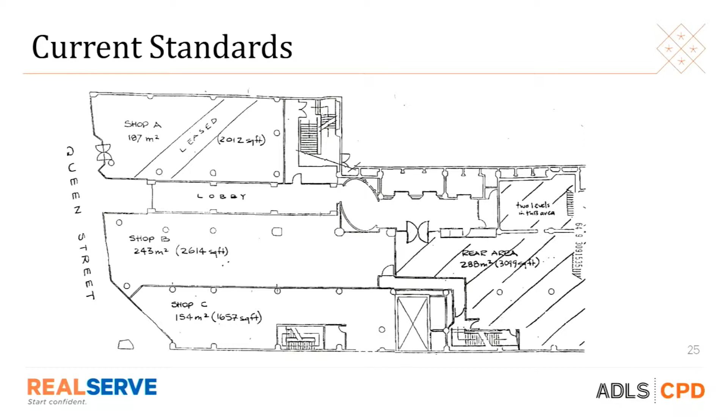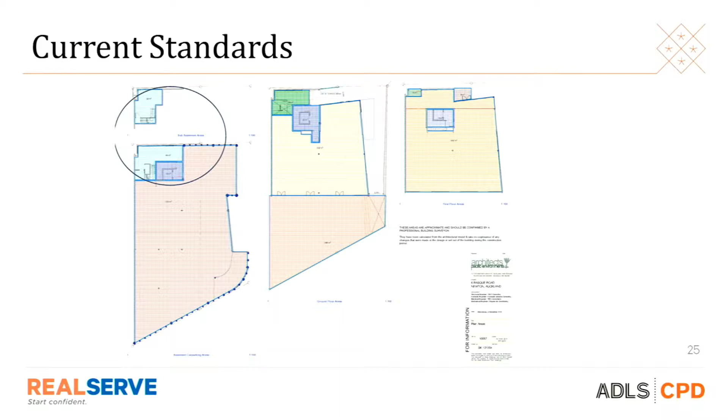Now, I can understand why people give us architect's plans. They've paid for a design, they feel what is designed ought to be what is built. If you've dealt with builders, it's yeah, she'll be right. So, unfortunately, the architect's plans are also not as-built plans. And sometimes we'll get the client who's got one of his colleagues to measure the building, and then we'll get those plans.

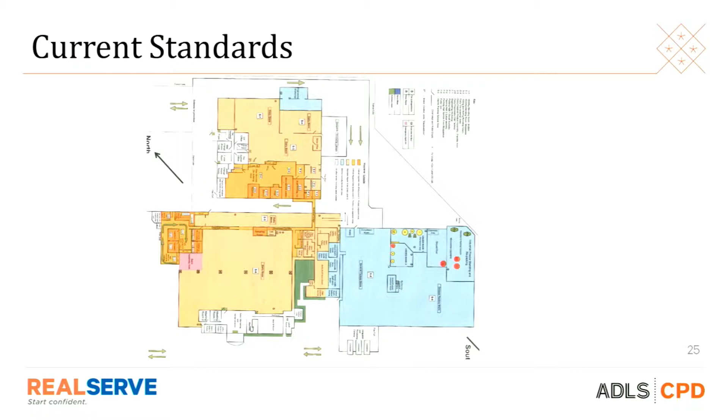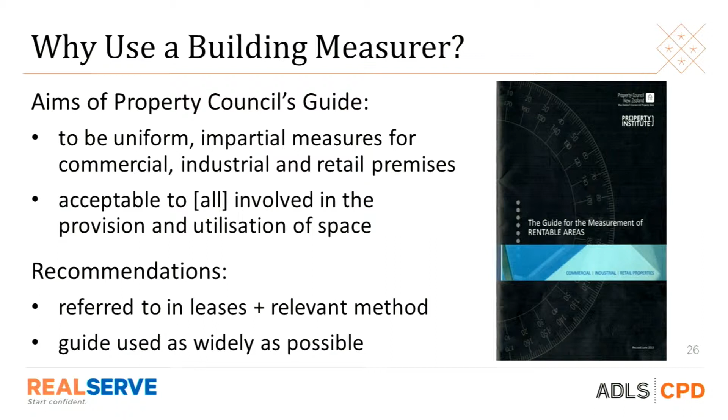So I guess you have to ask yourself, why are you then going to move on to get a different method? Why use a surveyor? Well, we as surveyors and building measurers typically operate to this guideline here. It's the guideline for measurements of rentable areas, and it's put out by the Property Council of New Zealand. Now, it was originally the BOMA document back in the very early 1980s. It's been revised about 4 or 5 different times. I think the last revision was 2013. Prior to that was 1996. So if you've got any surveyed plan that is older than 2013, I would suggest have it remeasured.

And this document has been influenced by lawyers, yourselves. It's been influenced by valuers. It's been influenced by building measurers. It's been influenced by tenants, by landlords, by property management. That is to say, that black book there has had as much influence from a vast spectrum of people that work in the property industry on a daily basis. So the booklet itself says that you probably should use this booklet and provide plans based on this booklet as often as possible. So that's the guide that we use.

And it tells us to measure 4 different ways. You have method 1, which is office whole floor. Method 2 is when you have 2 or 3 or 4 different tenants on that same floor. So that's office part floor. You have method 3, which is retail, and then method 4 is industrial. And all of those methods have their own descriptions. You'll see them in your books anyway. There's a plan that goes side by side so you can sort of compare and contrast what is relevant to which method.

What I'd like to do for the purpose of this presentation though is go back to some of these plans and show you in contrast to those methods within that black book how these plans do not help compared to what the method tells us. And I'd like to use the checklist that is also within that Realserve section. That checklist, sort of from my managerial point of view, operates in a scale of priorities, if I could put it that way.

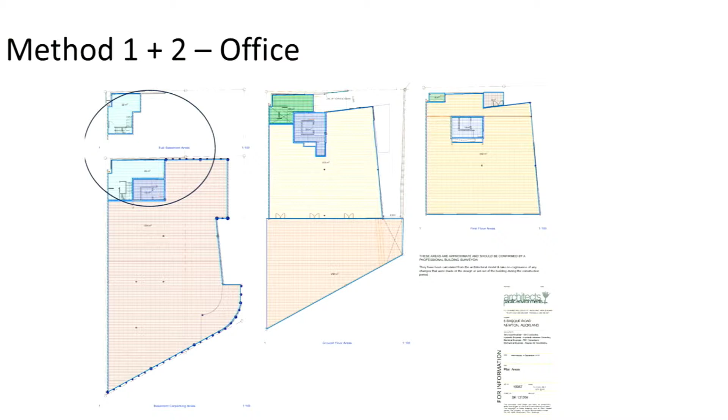So if I see that plan straight away, I know it's an architecturally designed plan. It's not as measured. There's no survey date, primarily because it wasn't measured, but it does have drawing dates and drawing revisions. Those don't particularly help when you need a surveying date. Well, how about lease line definition? Sorry, we'll go back one step. A method of measure. There's no method of measure on there. We don't know how the architect has defined his areas. In fact, that little disclaimer down the bottom, there's what he actually wrote.

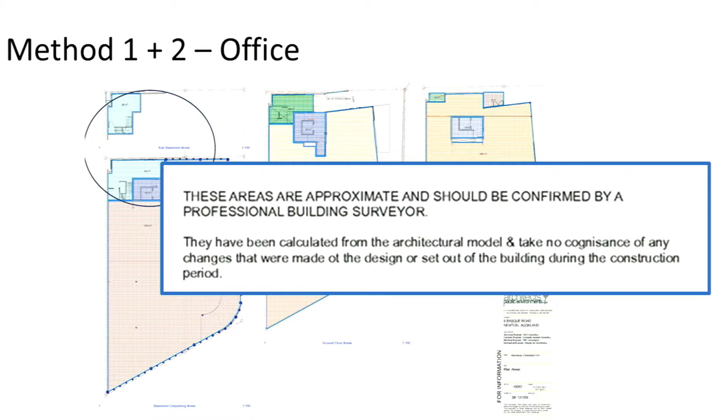We've designed it, we think we've got some areas, but you'll need a building surveyor to go and confirm it. But that's the plan that a property manager gave me and that they had been using. So not even they read the disclaimer. There's no lease line definitions at all on that plan, even if we look closely at this tenancy here.

So what areas are apportioned in this plan? Well, when I look at this plan, I have concerns with the areas that ought to be excluded. Lifts, common lobbies that come off the car parks, the fire egress stairwell around that whole column there. When I look at this plan, I see that as being method 1 because that is the sole tenant on that floor. And yet the stair void there has been included.

When I look at the sub-basement, that's the only stair going up and down between the 2 floors. So he's included part of it, yet based off the methods, we'll show you in a minute, part of that ought to be excluded. So what I'm just pointing out here, based off a very casual look at this plan, I know straight away a lot of that is inaccurate.

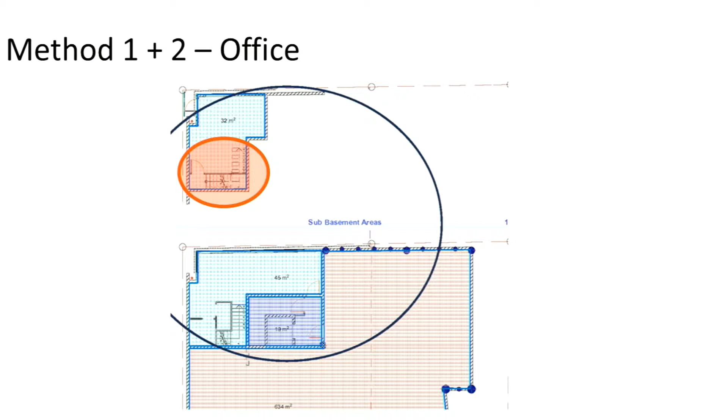So you know it's been measured on a particular day. Any other day past that date, if there's changes to that tenancy, you can go back to your plan and say, okay, I know prior to that date, that's why my plan is different. In fact, you know what method it was measured to. So if this tenancy suddenly changed to retail, you know you've got a problem on your hands.

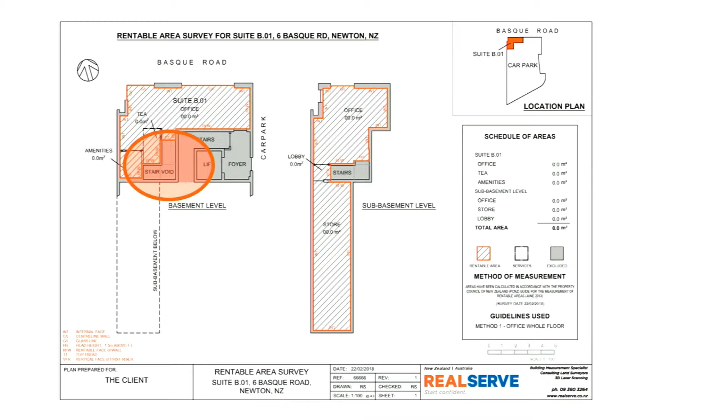I can now see that my stair void is excluded. That too has gone to the top tread of my top stair. It's gone to the rentable face of the walls all around that stair. Even in the sub-basement, it's now gone to rentable face, it's gone to the bottom tread, and there's a little code there called head height.

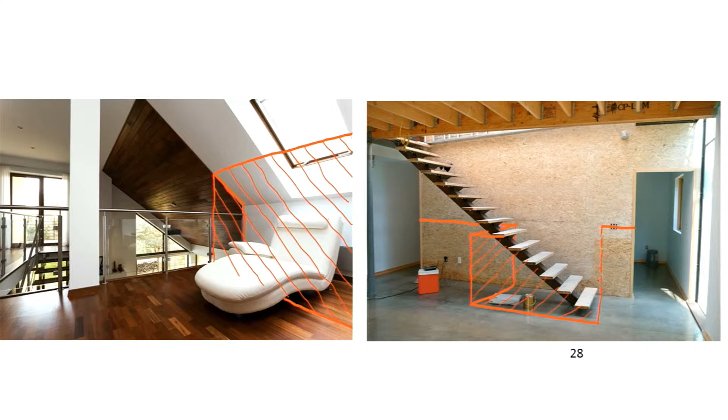When we're asked in that black book to measure areas, we go to 1.5 from the floor. Anything that comes under 1.5, such as in these examples, is then excluded based off the guidelines. So that height to 1.5, and if you've got, say, an A-frame roof that comes to a mezzanine, or the spaces under the stairs, as per this tenancy, those areas are to be excluded per that guideline.

The final thing on this tenancy particularly, even the architect said it in his disclaimer, is that we found them another 35 square metres. So if the property manager had continued with the architectural plan, their tenancy would be short 35 square metres.

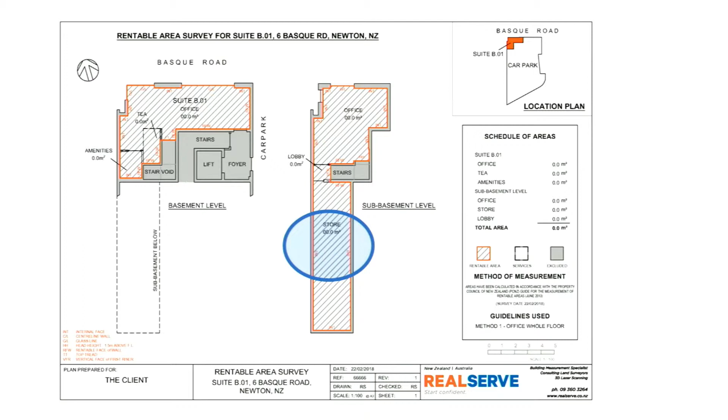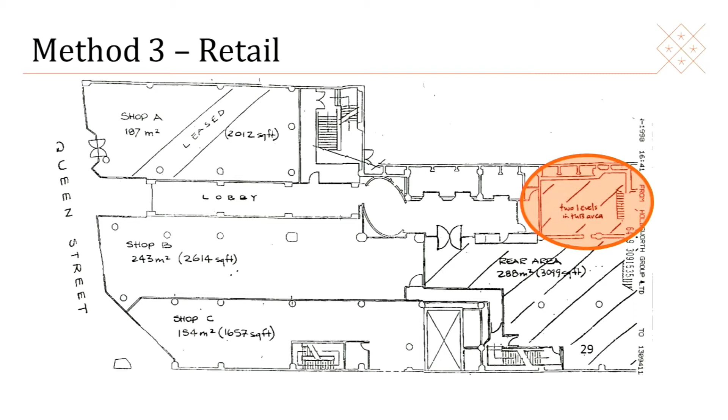Now, from my point of view, if I measure this to method 3, what are those areas? Are they levels like floors, or are they mezzanine floors? Because it's a big difference when we do our measures. We should be seeing things like this.

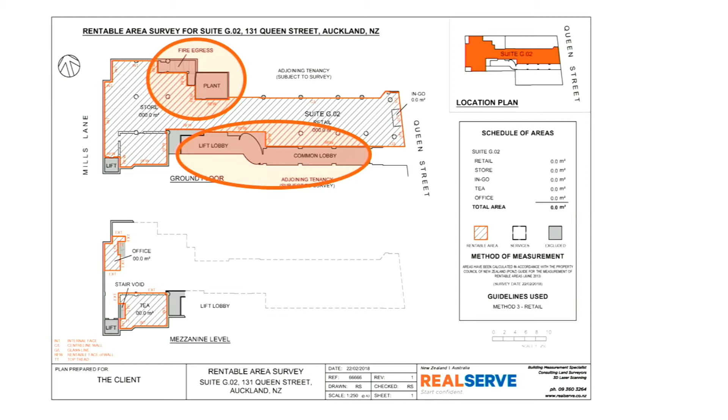Obviously, we know from these plans, we've got the method of measurement, we've got the process of knowing it is as measured, we've also got the date. So when we look at those discrepancies of excluded areas, we can see again at the lift lobby and the common lobby, it's to rentable face of wall, etc. We now know we've got a plant room up there, we've got the fire egress, all of those again to rentable face of wall.

The concerning thing, where the 2 levels were, they're actually 2 mezzanine floors. Mezzanine floors, you take them to external face when they go over a void. And with retail particularly, you'll see here on the ground floor plan, the stairs that lead up to them are included in the area. The void around those stairs going down is excluded. That's one of the largest differences between office and retail when the method changes. Sometimes you get an office tenancy which will soon become a retail, and there's that large discrepancy there.

Also, you'll see that the ingo at the Queen Street end there is separated out to show the area. That's primarily because although an entry into a retail will be there, retail guidelines tell us to take a straight shopfront lease line as per negotiations in the lease. But we do show on plans what the area of ingo would be.

The other thing that you'll see on that plan is a vast number of columns that are included on it. That is quite simply because any column, any shape, any size, any location is to be included in the area. The guides have over 2 pages of descriptions on how to deal with columns. So unfortunately, they are included. It might affect your tenant if they are the tenants, but it's good for the landlord.

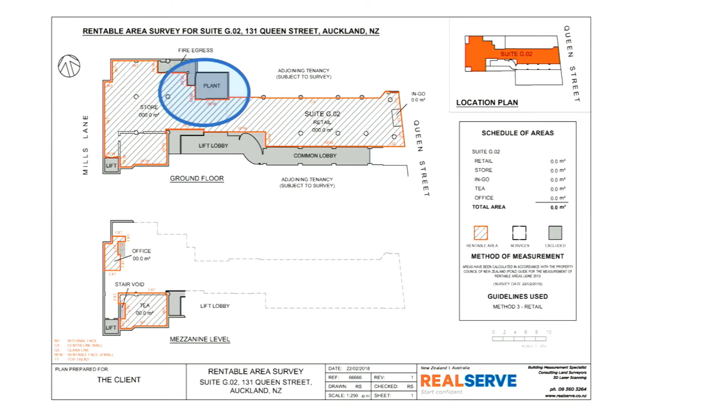The other thing with this plan, particularly in that blue area there, if you remember the strata plan, is that that whole area has now changed, it's increased. So this plan in general had another 95 square metres. So if you're now thinking, particularly as valuers, downtown Queen Street retail tenancy with a 10 metre shop front, I've got close to 100 square metres more. That's scary.

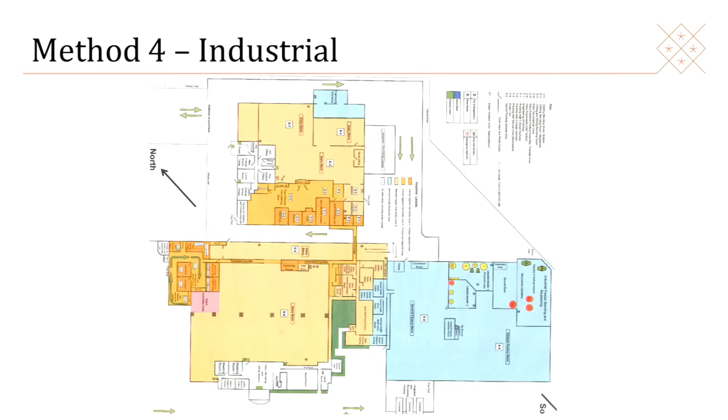The client that gave us this plan for an industrial site told us straight away there are around 2 metre discrepancies in it. So that was useful. I do know it was measured, but now I know that it's measured poorly. I don't know when it was measured, I don't know how it was measured. I do know there are no areas in that plan because it's showing different regions within the building, but it's not showing me exactly what that plan's trying to describe. In fact, it ignores completely the 3 different categories of measurement for industrial sites.

So what you're looking for, particularly with industrial, is a separation. The first being enclosed areas, those areas which are found inside the warehouse and office space itself. Now, industrial is the only method which then moves to taking the measurements to the external face of the building. The other 2 methods that you're looking for are semi-enclosed and development or unenclosed land. So semi-enclosed areas are things like open canopies, covered walkways, if you've got a patio over your lunch area, the covers over the entrances, for instance. Unenclosed areas are things like car parks, yard spaces, areas that could be used for development. So all those areas ought to be shown and described on your plan.

The guidelines too are then moving more and more to try and show the cubic volume of industrial sites. It's very important for a tenant, particularly, to know what the cubic volume of his site is going to be. So particularly on our plans, the more that we do for industrial, we like to demonstrate what that is.

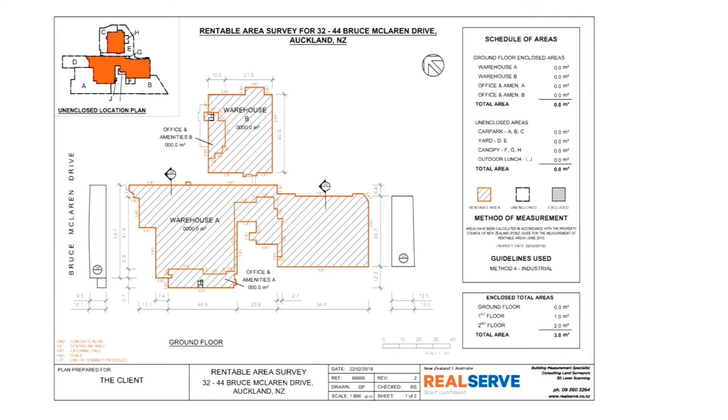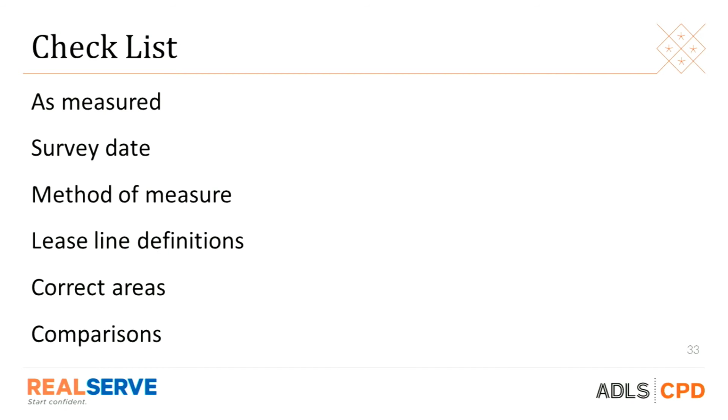As time's now running short, I'd just like to reiterate, because this, from my point of view of finding the area, is probably the most important thing that you as lawyers can do to help remind your clients. Make sure that you know your plans as measured. Make sure that you know there is a survey date to it. On that page now, there's a few considerations that go with each of these, so it's probably important to check why we're trying to encourage that you have a look at these as a checklist.

I'll skip over the future aspect because I'll just leave it here as a conclusion. I feel that a very good check, even for yourselves, is to go and have a look at your own leasing plans. See if you can find them. That's probably a starter. And then see if any of these match up to your leasing plans. And if they don't, well, that's the first step.